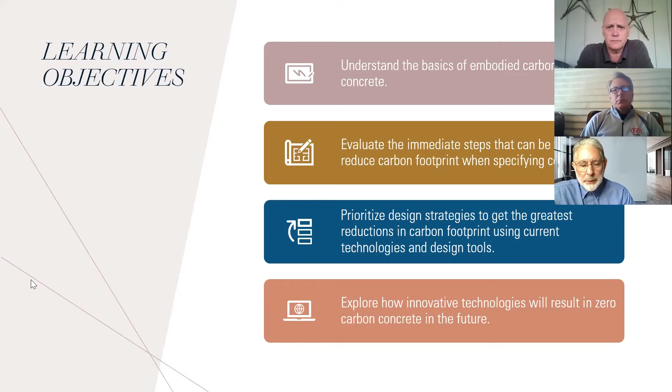Like all building products, however, concrete has a carbon footprint. This course will analyze the top 10 strategies to take advantage of concrete's benefits while ensuring the lowest possible carbon footprint. I'd like to quickly introduce today's presenters before handing things over to them.

Lionel LeMay is the Executive VP, Structures and Sustainability for the National Ready Mix Concrete Association. He leads a team of professionals to offer building owners and designers cost-effective, durable, and sustainable concrete building solutions through education, research, and design assistance. He has written many articles and books on concrete design and construction. He is a registered professional engineer and structural engineer in the state of Illinois. He is also a LEED accredited professional. Mr. LeMay holds a bachelor's and master's in civil engineering from McGill University in Montreal, Canada.

Okay, good. He is NRMCA's Senior Director, Building Innovations in Structures and Sustainability Group. Patrick is an expert in building operations and real estate investing. His primary objective is to offer technical expertise to developers and design professionals to incorporate resilient and safe concrete solutions into their projects. He integrates teams of architects, engineers, and contractors to offer durable, energy efficient, and economical concrete solutions that meet the needs of both the building developers and their tenants. He supports member companies by providing outreach and education to developers and design professionals, offering practical alternatives that underscore the economic benefits of building with concrete. His focus on low and mid-rise commercial and residential structures will advance the use of insulating concrete forms, tilt-up construction, and other cast-in-place framing options on the market.

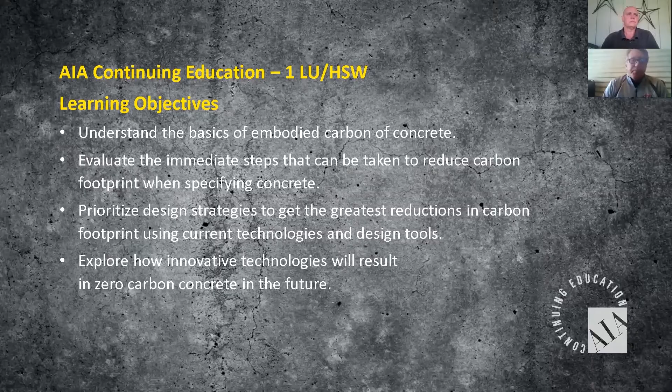And of course, to explore how innovative technologies will result in zero carbon concrete in the future. Concrete is unique for many reasons. Its formulation is highly influenced by its application. Design professionals and contractors have a greater influence on concrete formulation than they do on any other building product. Concrete can be made stronger or weaker, lighter, more flowable, stiffer, less permeable, depending upon the performance needs. No other building material is as versatile. It can be exposed to the elements or exposed for architectural reasons.

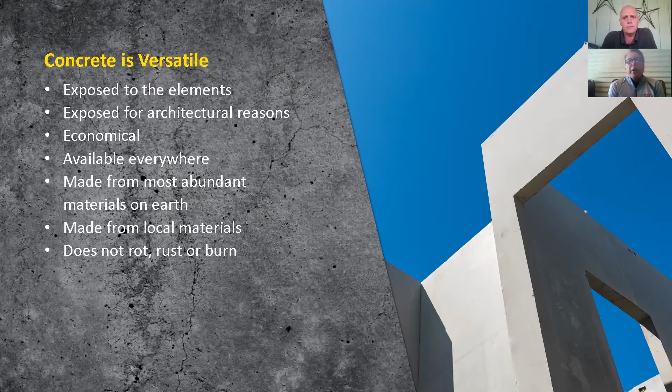Concrete is economical, available nearly everywhere, and made from the most abundant materials on the planet, and usually it's locally sourced. Concrete does not rust, rot, or burn. Concrete is used in nearly every structure where people live, work, learn, and play. It's used for the largest buildings, the longest bridges, the tallest buildings, the busiest airport, the most efficient rapid transit systems, roadways, theaters, stadiums, schools, apartment buildings, and of course, houses. Drinking water is transported in concrete pipes and reservoirs, and waste is treated in wastewater treatment plants made of concrete. Concrete is part of the infrastructure that connects us. It's a material that helped build modern society and will likely be part of improving modern society for some time.

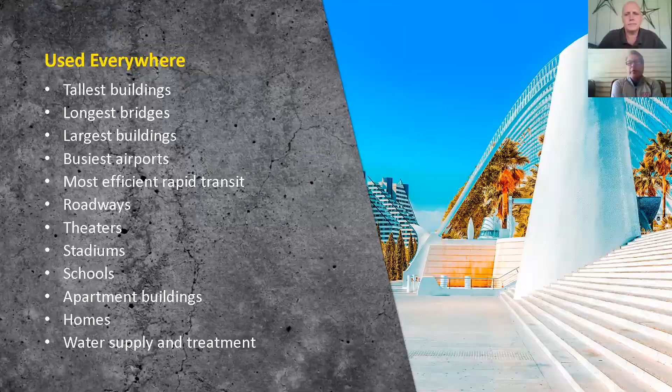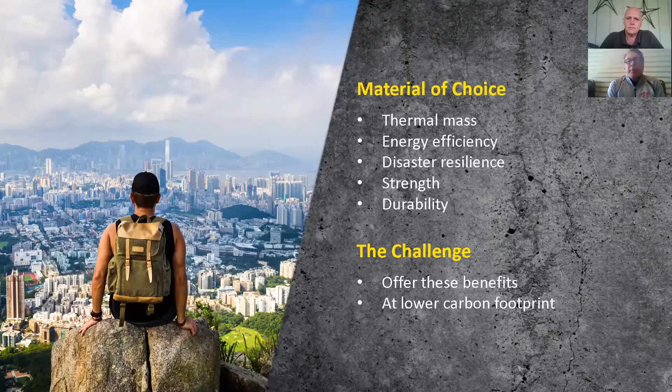Because of its thermal mass, concrete has long been the material of choice for energy efficiency, and because of its strength and durability, it has been the material of choice for disaster resilience. The challenge is to offer these concrete benefits with a lower carbon footprint. This presentation will discuss how design and construction teams can implement 10 simple strategies to reduce carbon footprint today. The recommendations are listed broadly in order of priority, but not in the order of impact reduction. All are important and all should be implemented. In addition, the strategies are meant to achieve a lower carbon footprint without impacting other traditional performance criteria for concrete.

Let's start with the top 10 things you can do to lower concrete's carbon footprint. Then I will go through each one in detail.

Communication. Communicate carbon reduction goals. Ensure good quality control and assurance. Optimize concrete volume. Use alternative cements. Use supplementary cementitious materials. Use admixtures. Do not limit ingredients. Set targets for carbon footprint. Sequester carbon dioxide.

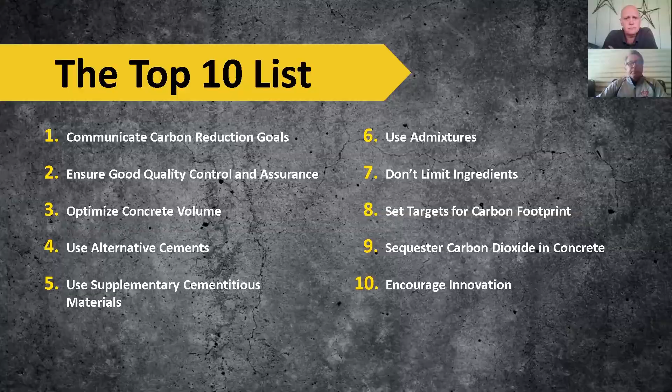So the most important step is communication. One of the basic tenets of achieving a goal is to effectively communicate that goal to everyone on the team. For concrete, this is especially important because there are so many parameters and criteria for concrete mixes, to make sure that reducing embodied carbon remains a top priority throughout the project. Reducing the embodied carbon must be included in drawings and specifications that are communicated to the owner, the contractor, and of course the product suppliers.

We have three basic recommendations. The first is to collaborate. The only way you can set carbon footprint goals is to understand the capabilities of contractors and the producers who will work on the project. Invite them in for the meetings with your design team. Understand technologies and concrete ingredients that are available locally.

Just because a product, we'll use slag as an example here in California, isn't generally used in the market, it doesn't mean you should not specify a product or prohibit its use. Generally, the reason a product is not used is because there is no demand for it. You need to create demand by permitting and encouraging its use.

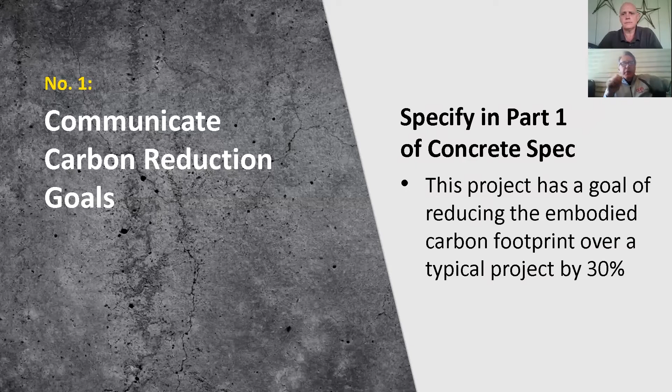Next, specify your goals or targets. State your goal at the beginning of the concrete specification. In section 03300 of the specifications, part 1, make it clear what level of carbon reduction you're trying to accomplish for the project and for the concrete itself.

Communicate early and often in pre-bid meetings. Are you all getting the sense that communication is the key to lowering your carbon footprint? It's important to communicate carbon reduction goals in other ways as well. Most projects have pre-bid meetings, which can be opportunities to communicate carbon reduction goals for all products to potential bidders.

Concrete producers design concrete mixtures to meet the needs of the contractor in terms of workability, which includes flowability, pumpability, finishability, etc. And based on their local aggregates, then using a sufficient quantity of cementitious materials to achieve the required compressive strength, which is higher than the specified compressive strength.

This over design, the difference between actual average compressive strength and the specified compressive strength, is based on well-established statistical models described in the codes and standards for concrete. There are well-established procedures for taking concrete samples, preparing test specimens, storing them on site, transporting them to a laboratory, and finally testing them in a compression testing machine or other apparatus.

Keep in mind, it's very important that concrete rarely tests well when testing protocols are not followed.

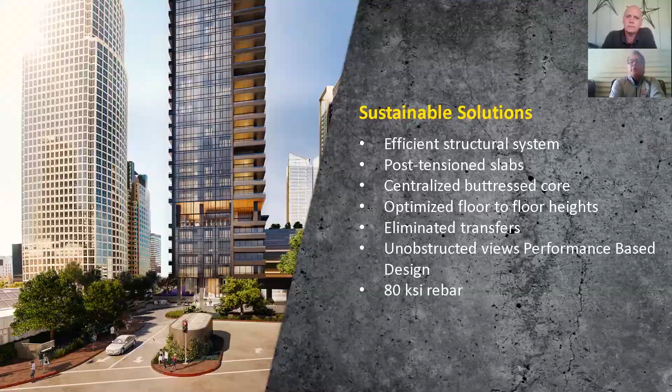The firm's optimization also included performance-based seismic design, 80 KSI rebar, wherever it led to a material reduction, so they were able to reduce their carbon mass. The design team set targets for carbon footprint and used life cycle assessment software to evaluate a benchmark building against a proposed building.

We cannot stress enough the importance of early communications and engagement with the contractor and the concrete supplier early on. This also helped tighten up the mix designs, where the single challenge of the aggregate being used moved to an imported, high quality aggregate, improved quality control, and variation in mix performance, allowing the same specified compressive strength reliability to be achieved with a lower quantity of cementitious material.

The structural engineer worked with the contractor to determine where faster strength gain was really needed and adjusted testing age accordingly to accommodate the higher volumes of SCMs.

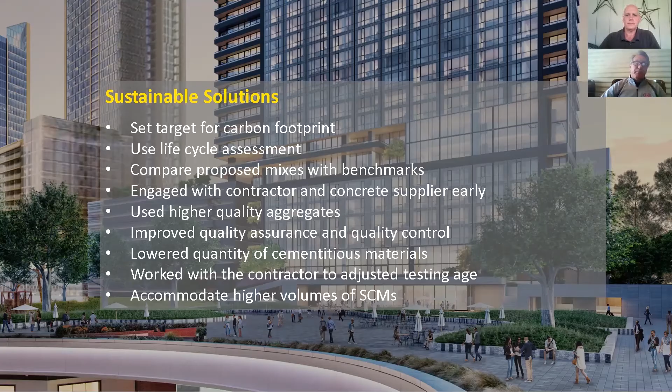The design team reduced 24% of the total project embodied carbon footprint at zero cost add. There was no cost add at all, and that's after accounting for the carbon from barging aggregate from the Pacific Northwest down to LA. On the PT slab mixtures alone, they reduced the carbon footprint of the mix by 46%.

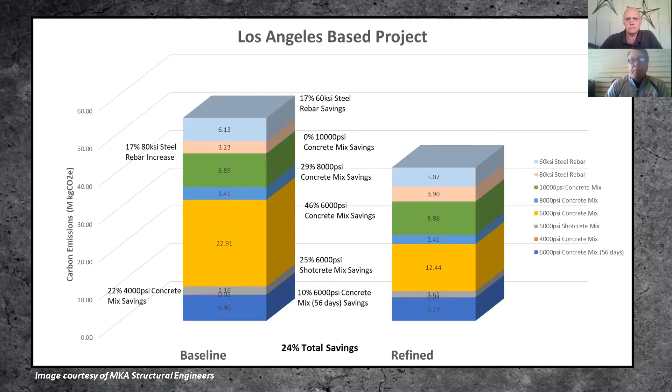All right, thank you, Patrick. Excellent presentation. Let me go ahead and continue on. So this is strategy number 4, which is use alternative cements.

There are several alternates to Portland cement, but the most common are called blended cements. These combine ordinary Portland cement with other materials. The most common type of blended cement is Portland limestone cement, often called PLC for short, but technically it's ASTM C595 type 1L cement. This blended cement combines up to 15% limestone interground with Portland cement to make a cement with a carbon footprint that is up to 10% lower than ordinary Portland cement, with performance that is identical to, and in some cases, better than ordinary Portland cement.

There are 4 types of blended cements under ASTM C595, ranging from type 1L cement to type 1S, combining slag and Portland cement, type 1P, combining a pozzolan like fly ash with Portland cement, and type 1T that combines 2 of these constituents with Portland cement.

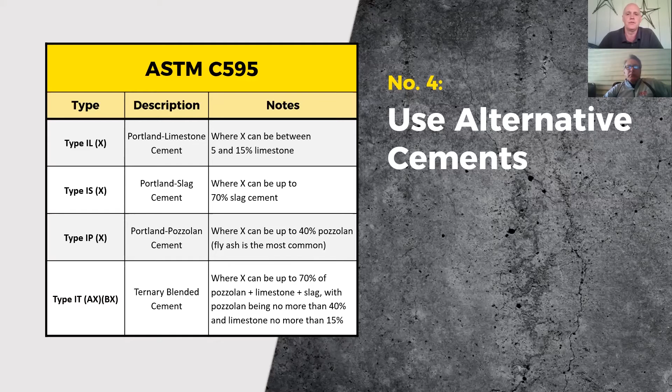Now, both ASTM C595 and ASTM C1157 have been permitted in national standards such as ACI 318 and ACI 301, ASTM C94 for ready-mix concrete, and in the building codes for at least 2 decades. But most project specifications inadvertently prohibit their use by not listing them in the specification.

The solution for this one is easy. Just list all 3 types of hydraulic cement in your specification. If there's one thing that you take away from this presentation, I would say make sure you go back to your concrete specification and check to see that you permit ASTM C595 and ASTM C1157 for hydraulic cements. Obviously, you're going to want to check with your structural engineer as well, but make it clear why you want to include those cements as part of the specification, mainly to reduce carbon footprint.

The next strategy is to use supplementary cementitious materials. Nearly all concrete used today has some amount of supplementary cementing materials. The most common are fly ash, slag, and silica fume, in that order. However, there are others such as metakaolin, volcanic ash, rice husk ash, and ground glass, just to name a few.

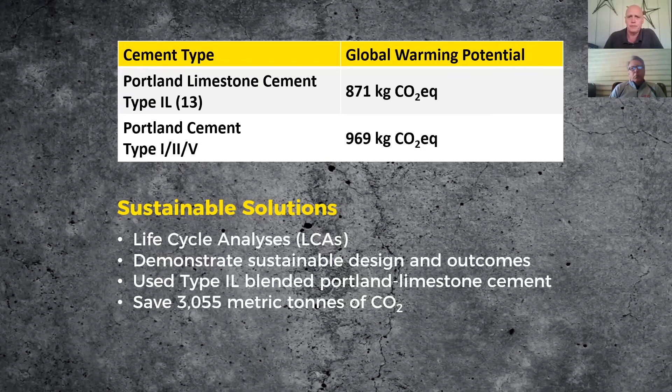The designers also exposed concrete for aesthetic reasons, but also took advantage of concrete's ability to absorb carbon dioxide. Through collaboration and open discussion, the project teams determined the aesthetic, structural, and environmental benefits of the concrete on the project. In addition to CO2 reduction, the use of Portland limestone cement also enhanced the appearance of the exposed concrete. You can see from this image that the PLC used on the project resulted in a relatively light colored, consistent concrete.

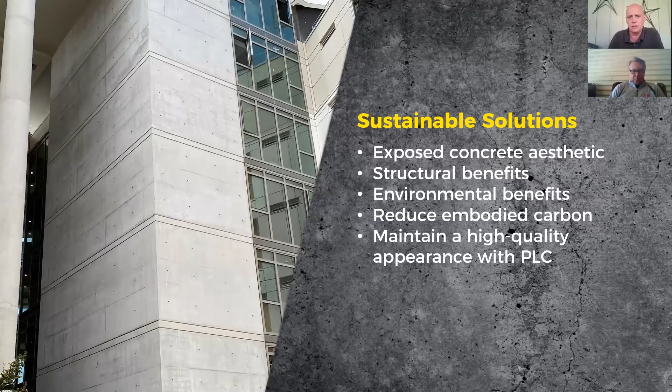Strategy number 6 is to use admixtures. Nearly every concrete made today uses some sort of admixture. Most affect the plastic properties to make concrete more workable, economical, and shorten or lengthen set time. Without admixtures, concrete could not be pumped hundreds of feet in the air or transported hundreds of miles, and many architectural finishes could not be achieved. There are water-reducing admixtures that reduce cement demand, accelerators that improve strength gain, and viscosity modifiers that permit concrete to flow into very tight spaces, among others.

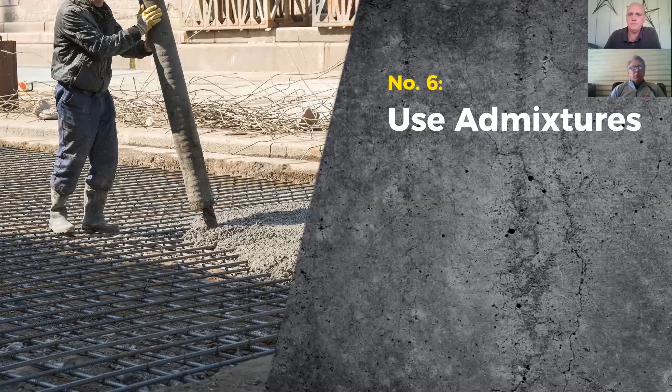An example of how effective an admixture can be at making concrete perform better while also reducing carbon footprint: take a water-reducing admixture that reduces water content in a mixture by 12%. This results in a reduction of cement content by about 70 pounds per cubic yard for the equivalent slump and strength targeted, which results in a carbon footprint reduction of roughly 10%. That's for a 4,000 PSI concrete; it might be more for a higher strength concrete.

There are also high range water reducing admixtures that can reduce water content by as much as 40%, but the potential reduction in cementitious materials may not be feasible because of other constructability needs. The point is you can likely go higher than 12%.

Here's another simple solution: allow all admixtures that meet ASTM standards to be permitted on the project. You should also consider admixtures that don't meet an ASTM standard, so long as there are proper submittals and technical backup. This comes back to encouraging innovation, only because admixtures are being developed all the time, and there's no way for them to quickly get a standard. In some cases they eventually do, but it just takes a long time to meet a standard.

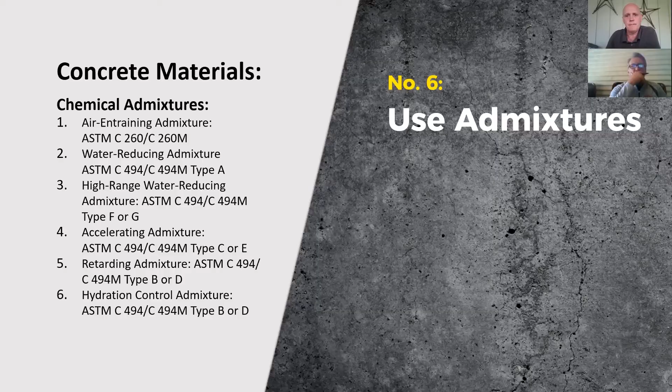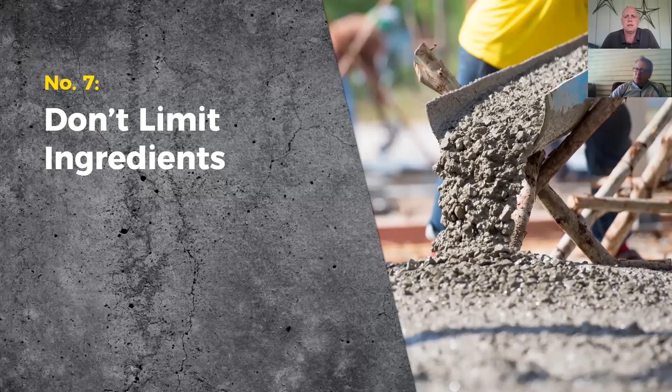Number 7, a little more difficult, though it just requires diligence from your specifiers: don't limit ingredients. The tendency is to try to limit certain ingredients in concrete, and that limits the concrete producer's ability to meet performance criteria, let alone reduce a carbon footprint. Let me explain: oftentimes we see specifications that have limits on water to cementitious materials ratio. In most cases, requiring a maximum water cementitious materials ratio is unnecessary and drives up cement content.

There are times when a maximum water cementitious materials ratio makes sense, mostly for concrete exposed to freezing and thawing, but it's not necessary to actually call it out in the specification. Identifying the exposure class of the concrete per ACI 318 and 301 will suffice, since the requirements for water cementitious materials ratio for concrete exposed to freezing and thawing are all outlined in those specifications.

The same is true for air content. It's only required for concrete exposed to freezing and thawing, and air entraining decreases concrete strength. For instance, a 10% increase in cementitious materials content for 4,000 PSI air entrained concrete compared to non-air entrained concrete, for the same strength, roughly translates to a 9% increase in carbon footprint. So if you're unnecessarily using air entraining admixtures in some mixtures, you're unnecessarily increasing the carbon footprint and wasting cement, which is what makes concrete so valuable.

Do not list a maximum or minimum cement content, maximum or minimum SCM or supplementary cementing materials content, or quantity of admixtures. Do not limit water used for making concrete to potable water. Believe it or not, there is an ASTM specification for water used to make concrete that addresses all the health and safety needs, but you don't necessarily need to get water out of a tap to make concrete.

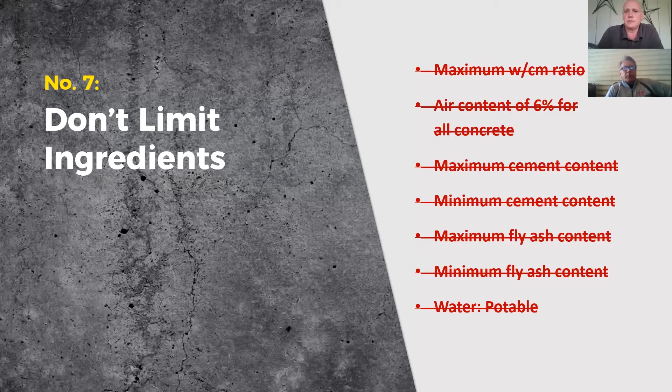The recommendation here is to provide a table in the specification for concrete listing the important performance attributes for concrete. Each project will have different values depending on project requirements. So for this example, class 7 concrete, which is exterior pavements, that would have a water cementitious materials and air content limit based on the exposure class. You can see here F3 is what triggers it.

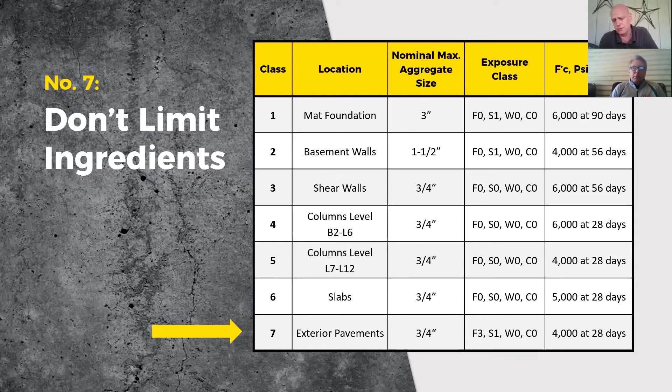And finally, concrete that won't be stressed for significant time periods can be tested at later ages, which means higher volumes of supplementary cementing materials can be used, resulting in lower carbon footprint. So for example, class 1 concrete mat foundations, you can see the F'c requirement is 6,000 PSI at 90 days, which means you can use a much higher SCM content.

Number 8, set targets for carbon footprint. This strategy is for those who have some knowledge of life cycle assessment, experience with environmental product declarations, and an understanding of global warming potential for the targets to be implemented effectively. But most teams now working on a project that has a carbon footprint goal will likely have somebody who understands life cycle assessment and the tools used for doing those evaluations.

First, you want to resist the temptation to set carbon footprint limits for individual classes of concrete. In other words, you don't want to have each class of concrete or mix on a project with a carbon footprint limit. In effect, this is the same as providing prescriptive limits on materials and leaves little room for the contractors or the contractor and producers to innovate and meet the project performance requirements, including things like budget and schedule.

The best approach is to use a whole building life cycle assessment to set a carbon budget for all the concrete on the building. And for that matter, if you're working on a LEED project that has whole building life cycle assessment or trying to meet that credit, you're going to probably want some carbon budgets on some of the other materials too on the project or end products.

Now, it's still necessary to have a general idea of what the carbon footprint of each mix will be to set a carbon budget for the building. And although we won't get into the details of that today, our second presentation coming up in May will get into a lot of the detail on how to do that.

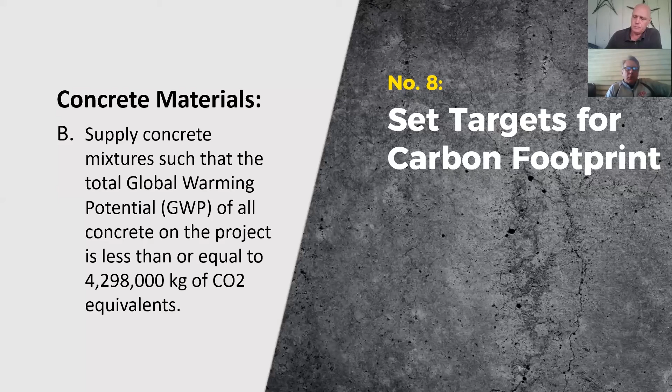So this is our next case study. This is the Oracle Waterfront campus in Austin, Texas. It's a relatively large office building, 550,000 square feet, ground level parking of 150,000, and a large parking deck of 650,000 square feet.

In this case, the building team, construction team, and design team were challenged to have the project blur the lines between public and private property and be welcoming to the pedestrian-friendly community that surrounds it, while meeting the challenges and sustainability criteria of LEED and the Austin Energy Green Building standards.

The structural engineers worked closely with the design build team to meet the demanding schedule, structural challenges, and environmental criteria for this project. The design required oversized floor plates to accommodate open office spaces, expansive balconies and terraces, and large meeting spaces. They also made the designer's vision for a truly unique lobby space come to life with a floating stair and bridge.

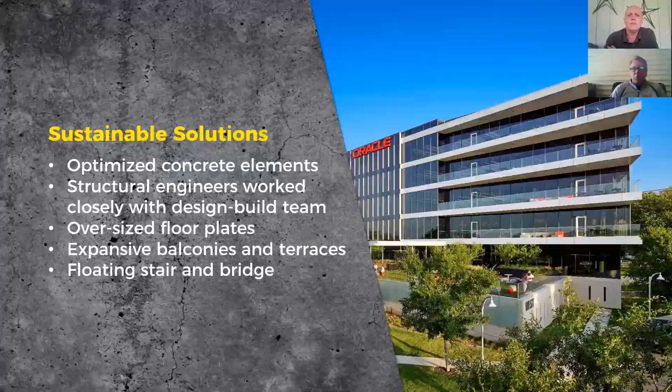The structural engineers conducted a life cycle assessment using software which considers the embodied impacts of all materials of the structure and enclosure for the project. Since this was such a concrete intensive project, they focused on improving concrete mix designs to meet the LEED whole building LCA criteria for lowering environmental impacts.

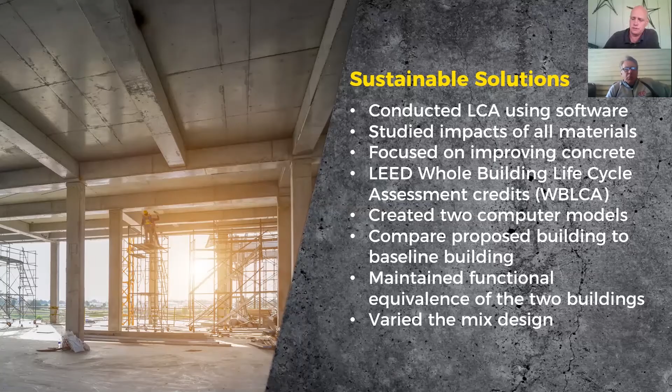They created 2 computer models to compare the proposed building to a baseline building, fully maintaining the functional equivalence of the 2 buildings, but varying the mix designs. The improved mixes were analyzed by the software to determine the embodied environmental impacts per cubic yard. Based on that analysis, the concrete mixes were implemented into the whole building LCA.

They also varied the age for testing concrete to allow for higher volumes of fly ash. For example, since the foundations did not see the full loads until much later in the construction process, they specified testing concrete at 56 days for the drilled piers.

As a result, the project met the rigorous LEED whole building LCA credit by showing at least a 10% reduction in global warming potential, 12% in this case, along with at least 10% reduction in at least 2 other environmental impact categories. Keep in mind, this is not just for concrete, this is for all of the structural and shell exterior envelope components of the building. So for the concrete to meet those criteria, typically you have to have a pretty significant reduction in its carbon footprint.

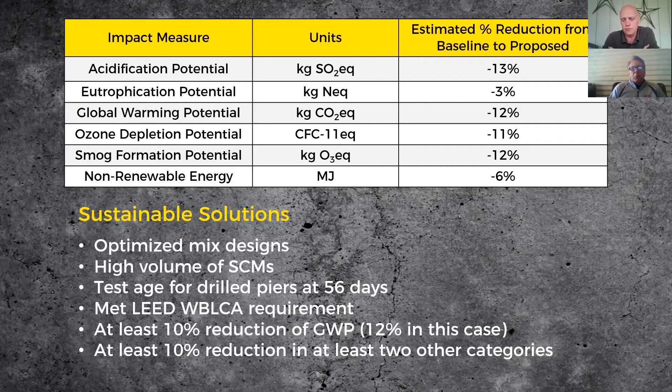This is strategy number 9, which is sequester carbon dioxide. Because there's a lot of concrete used on many projects, if we can sequester carbon dioxide in concrete, it's a great way to permanently sequester that atmospheric carbon.

Carbonation is a naturally occurring process by which CO2 penetrates the surface of hardened concrete and chemically reacts with cement hydration products to form carbonates, basically turning back into limestone. For in-service concrete, carbonation is a relatively slow process with many dependent variables. The rate decreases over time, because carbonation decreases permeability and occurs from the surface inwards, creating a tighter matrix on the surface that makes it more difficult for CO2 to diffuse further into the concrete.

While slow, the carbonation process does result in an uptake of some of the CO2 emitted from cement manufacturing, a chemical process called calcination, where CO2 is emitted. Theoretically, given enough time and ideal conditions, all the CO2 emitted from calcination could be sequestered via carbonation. We don't necessarily have ideal conditions, but obviously exposed concrete is a big part of it.

In the specification, I would say, consider permitting the use of recycled aggregates made of demolished concrete on a project, and possibly require those recycled aggregates be exposed to air for 1 year before being used. This idea works probably best when you're revitalizing a site, maybe taking existing structures, demolishing them. You can take some of that aggregate, let it stand for a while before construction starts, and then use it as part of the project.

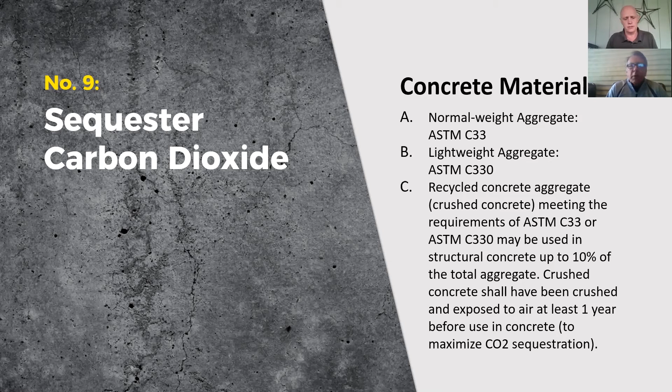You can use recycled aggregate in some structural applications. Usually we've done some testing, and there has been some testing where you could use up to, say, 10% and really not affect the performance of concrete. I'm not talking about using 100% recycled aggregate in concrete necessarily, but using a small portion of the aggregate as recycled aggregate. And then require that all the aggregate base and any fill materials used on the site be from that crushed concrete that's already been exposed to air, which would then sequester the carbon dioxide it would have absorbed during that period.

There are also new products on the market that take advantage of this natural process of carbonation. You can inject CO2 into concrete when it's being made, or cure concrete under CO2 environments. There are also companies now working on producing artificial limestone aggregates. Some of these technologies are more commercialized than others, but because of interest in lowering concrete's carbon footprint and embodied carbon of buildings in general, I think we're going to see these technologies used more and more often.

Again, using exposed concrete on a project, both for interior and exterior applications, is a good idea if you can do it. This has the added benefit of reducing the amount of finished materials, as I mentioned before, in addition to absorbing CO2 throughout the lifetime of the building.

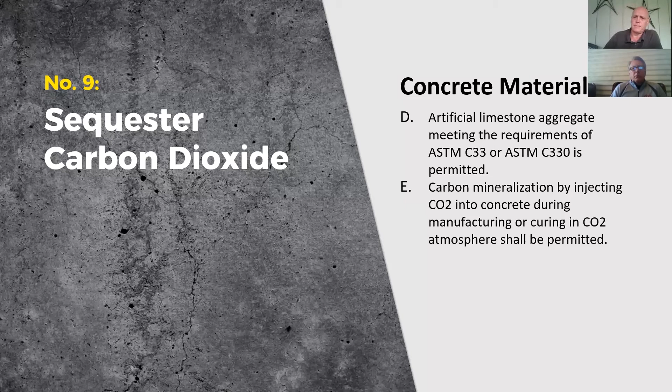This is strategy number 10, which is to encourage innovation. Of the 10 strategies, this is probably the most challenging. Throughout this presentation, I've talked about the importance of not listing specific products or naming certain technologies in the specification, and instead simply listing the standards that one must meet. But the problem is that this permits innovation, but does not necessarily encourage it, and many innovations might not meet a current standard.

So this really goes back to strategy 1, which is communicating your carbon reduction goals early on, so that contractors and producers are given some license to look at innovative solutions and offer them early on during the design process.

Design charrettes—I realize concrete producers and contractors are typically not part of design charrettes, but this is a whole different ballgame now. We are in an era where we need to have the entire team involved in providing solutions, so that would be a great place to start: encourage your engineers, contractors, and producers in the area to come into the design process to offer these solutions.